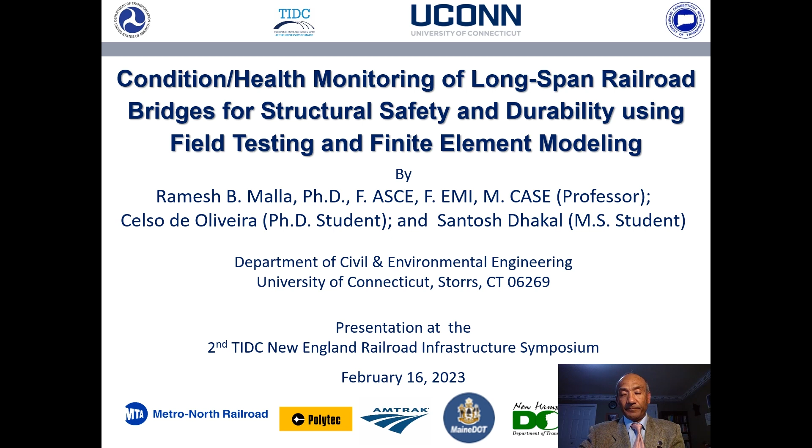As for the background and significance of the works we have done here, I think we all know the importance of railroad transportation system for the economy of the nation and the regions. It should suffice to say that in the New England region, we have the NEC, that's the busiest passenger line, and also there are numerous bridges which are more than 100 years old. So it is important that we study health monitoring techniques for this kind of bridges for their durability.

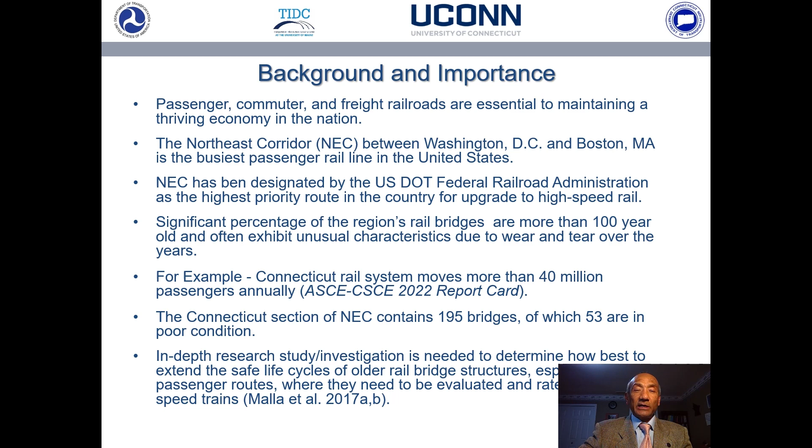The objective of this study is to develop efficient, cost-effective methodology for accurate response determination and health condition monitoring of existing railroad bridges using field testing, finite element modeling, and material characterization. Today, I will be presenting some of the results in these aspects of research. We have investigated in detail two bridges in Connecticut. One is Devon and another is Cos Cob Bridge. Today, due to lack of time, I will be presenting some of the results only on Devon Bridge.

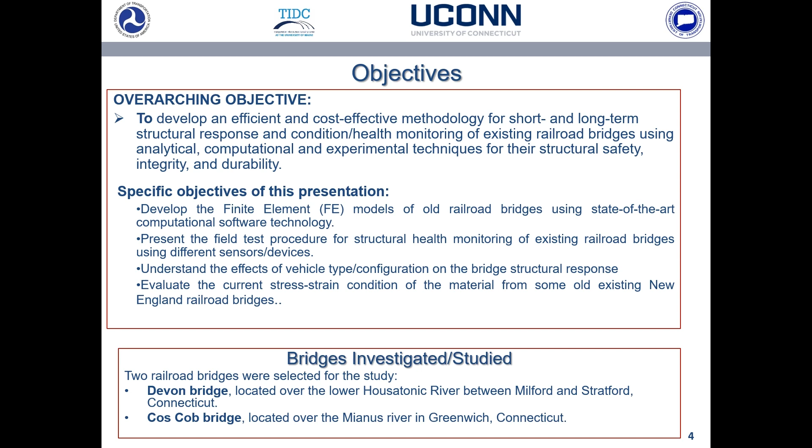Given on this is brief information on Devon Bridge, one of the two bridges we have studied in detail so far. Devon Bridge is over the Housatonic River between Milford and Stratford in Connecticut. The bridge was built in 1906 and owned by Connecticut Department of Transportation. The bridge has 7 spans and total length of the bridge is 1,067 feet. And the span we studied is the eastmost span. That span is about 218 feet long. As you see here, we have shown the schematic as well as 3 pictures of the Devon Bridge.

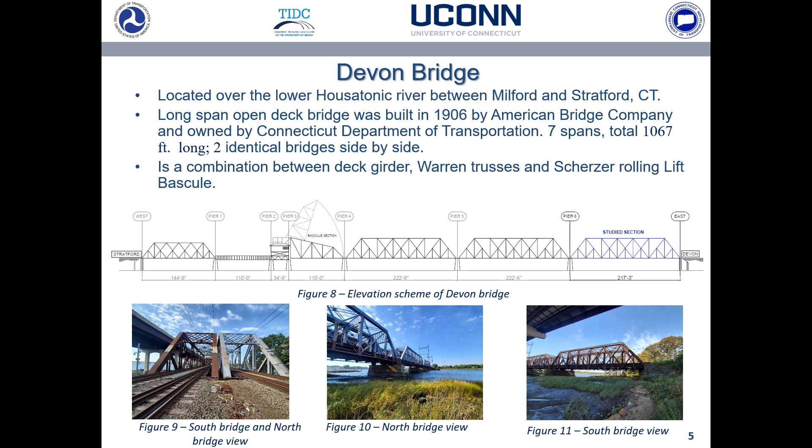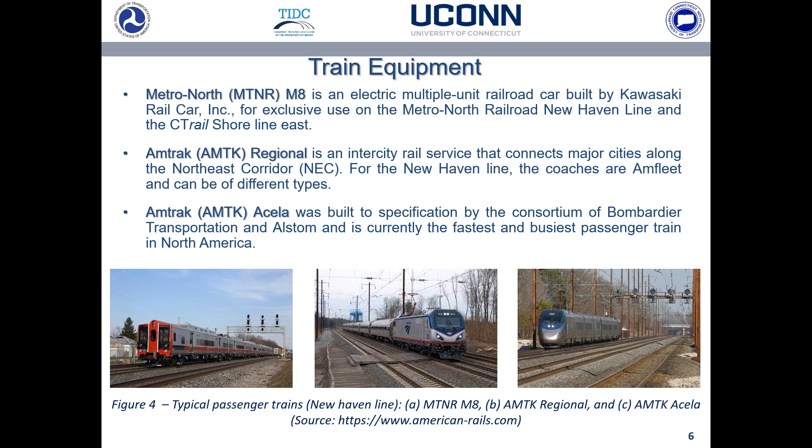Shown here are the 3 passenger trains which typically run over the Devon Bridge. The left is Metro North, the middle is the Amtrak Regional, and the right is Amtrak Acela. The Acela has engines rear and front, and the Amtrak Regional has an engine only at one end. And Metro North trains don't have an engine as they run on electricity.

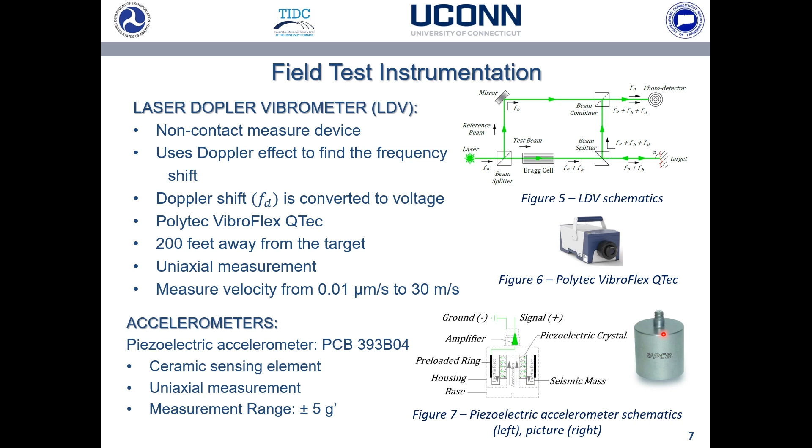Now I will present brief information about the field test of the railroad bridges we have studied. This slide presents the instrumentation we use. On the top, this is the concept of laser Doppler vibrometer, which uses the Doppler effect to find frequency shift and then determines the velocity. And this is a non-contact sensor. The other type of device we used was the accelerometer. A piezoelectric accelerometer that is attached on the bridge to measure the acceleration.

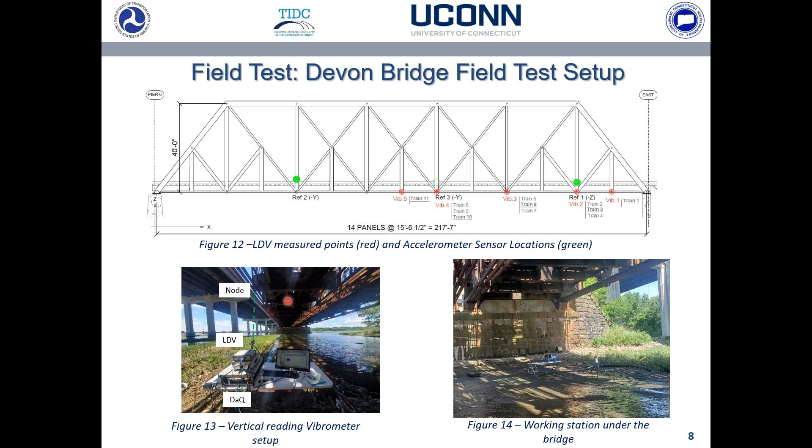I would like to present the test setup on Devon Bridge on this slide. As you see in the top, we see a truss, one of the 2 trusses on span 7 of Devon Bridge, and the red dots are where we measure the velocity of the bridge with the help of laser Doppler vibrometer, and the green dots are where we attach the accelerometers. Now the picture below shows the laser Doppler vibrometer setup. We throw the beam from the laser Doppler vibrometer directly upward on the bridge, and the reflected beam is measured or collected to get the velocity.

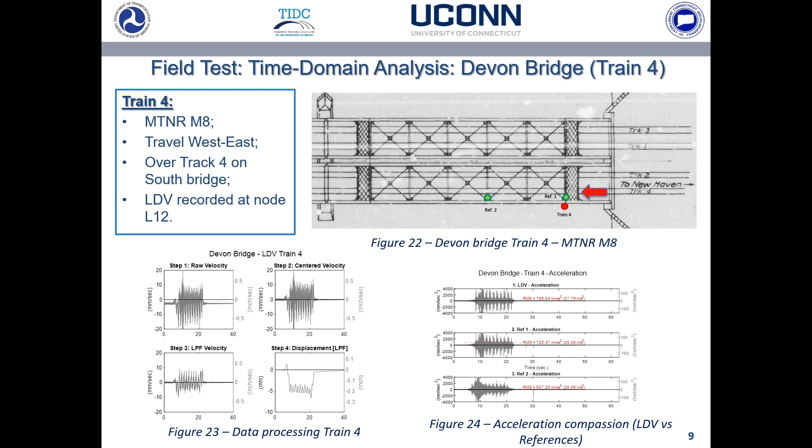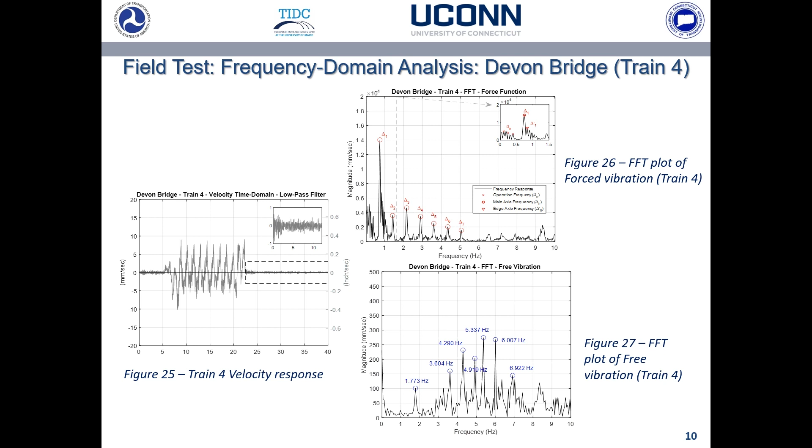The bottom one is the data processed after the train leaves the span, the particular span 7. That's the free vibration. Even though the train is off the span, the bridge still vibrates some time. So that gives us the natural frequency. So this diagram will give us natural frequency and the axle frequencies.

The additional advantage of the field data collected, we have discovered, is that we can even get certain parameters concerning the trains, the vehicle going over the bridge. As you see here on the left side is the displacement we got from processing the field measured velocity from the laser Doppler vibrometer. Now, if you count these peaks, up and down peaks here, these are all given by the axles. We are measuring velocity at a certain point, and when the axle comes there, the displacement would be larger, and when the axle goes past the point, displacement will be lower.

So if you measure the peaks, these peaks give a very good idea of how many cars the train has, and of course, if there is an engine, then the engine is also there, right? The peaks will give that information, the number of peaks.

The other thing is measuring the time between the two peaks and the distance between two consecutive axle systems. From there we can get the velocity of the train. So if you divide the distance between two axle systems by the time between these two consecutive peaks, you're going to get velocity, and that's exactly what we have shown in this table here. And for this case, the velocity is 41.78. So we get two very good pieces of information about the trains.

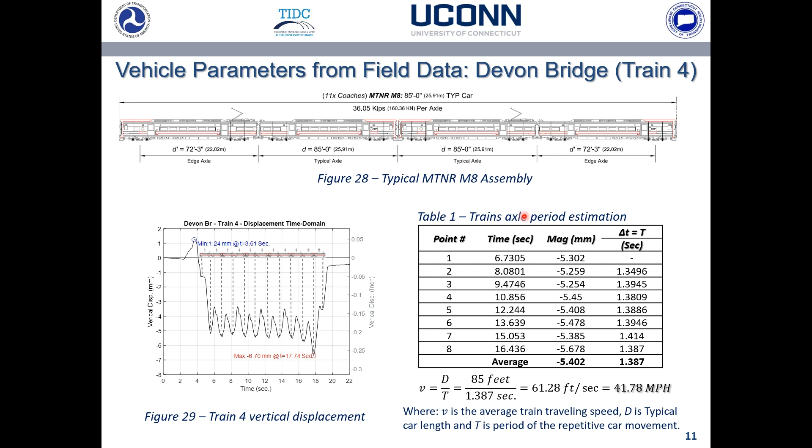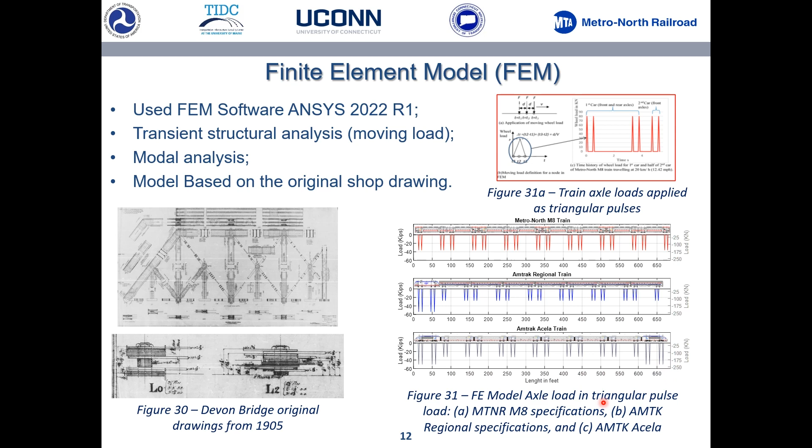Now the second one here, as you see, at the very beginning there are two axle systems, front and rear axle systems of the engine. So the magnitude is larger than the cars after that. Now if you go to the bottom diagram, there are two engines, the front side and the rear side. So the magnitudes of the axle loads there are much higher than in between, which are the cars.

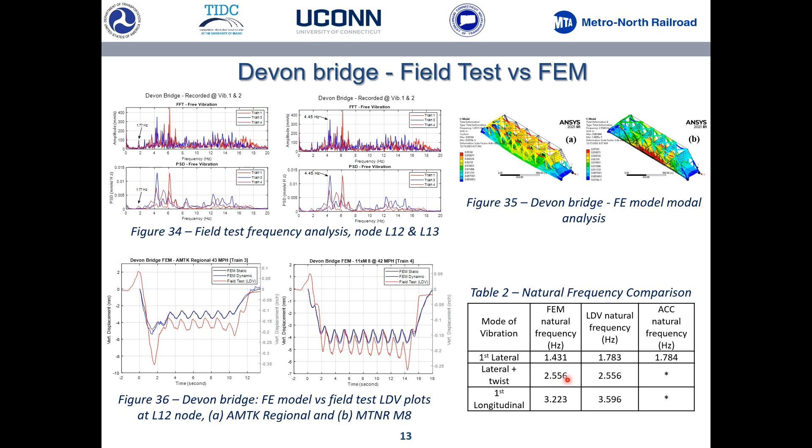They're very close. I would say the second and third very close. The first one also not that bad. 1.4 versus 1.78 from the field, 1.4 from the finite element.

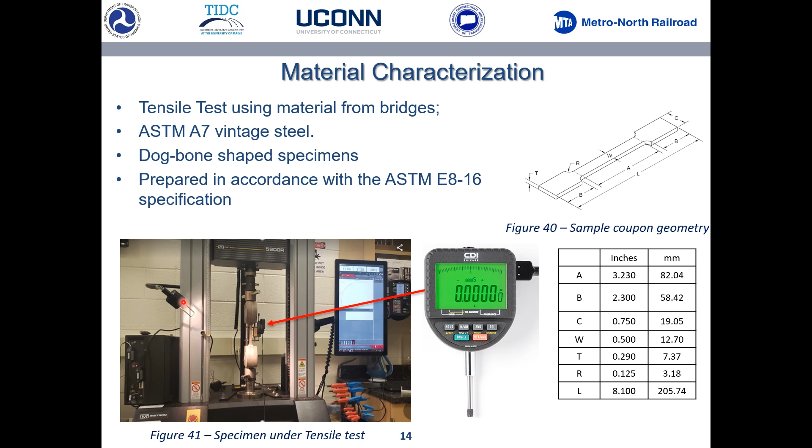Now yield stress more or less same as the original steel. By the way, these bridges are made of A7 steel. Only thing we saw is a little bit decrease in the ultimate stress, but I think mainly for design we use the yield stress. So as far as the material is concerned, they look pretty fine.

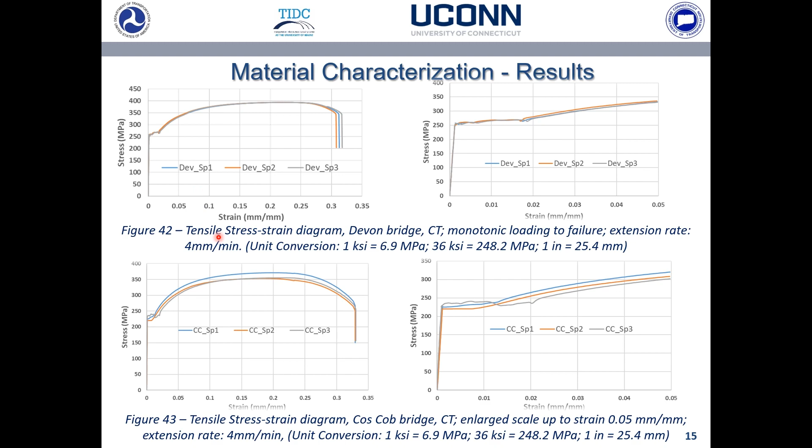Now, summary and conclusion. Again, lack of time, I cannot go into detail, but just to summarize, we studied the dynamic response of our bridges under the service load, Amtrak Acela, Amtrak Regional, and Metro North, and we computed natural frequency, mode shapes, displacement using both finite element as well as the field data collection, and we collected field data from 2 different kinds of instruments, laser Doppler vibrometer and accelerometers, and also tried to characterize the material using the tensile testing.

So this information should be very valuable for practicing engineers to process the data first, and next to get some idea or assess the condition of the bridge. There are some differences in the field collected and the finite element model data in displacement on the Devon Bridge. We are looking further into the cause for that.